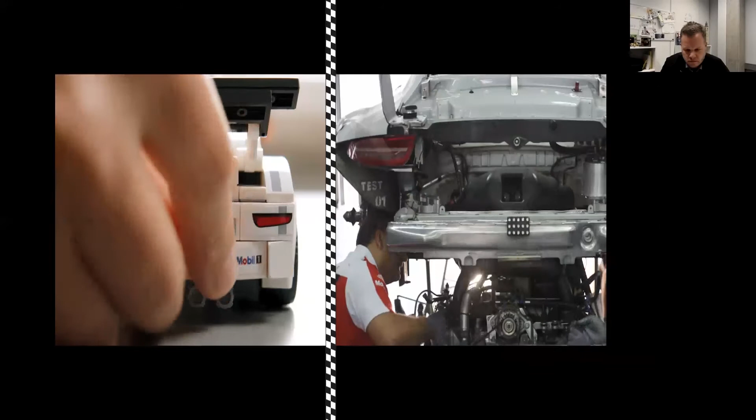Race cars, a boy's dream, a man's reality. Building the perfect race car is an art. It takes skill, dedication, patience, and passion. It's the kind of passion that turns men into boys, and boys into men. Lego, Porsche, we build race cars.

I hope that left a small smile, because this is actually very much what it's about for us. We are, as you know, a humble and proud producer of something most important in many of our lives, and that is our kids. That's what we've been doing for 80 years of history.

A little bit more about the Lego Group, just some factual things. I know you don't look for large company presentations, so I won't do that, but there are some things that have a logic to why I actually work on digitalization, and that's why I thought it would be good to show you.

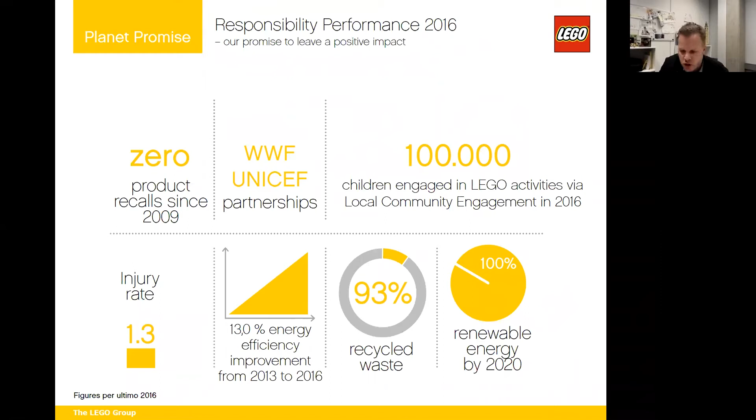Then our recycling and waste, that's also very important for us, so we can work on not giving anything back to the planet that we do not really wish for. And then we also work very much with renewable energy, and very much also with our owners investing in wind turbines, so you can actually see that on the next slide. I'm not spending so much time on this, but that's a positive impact.

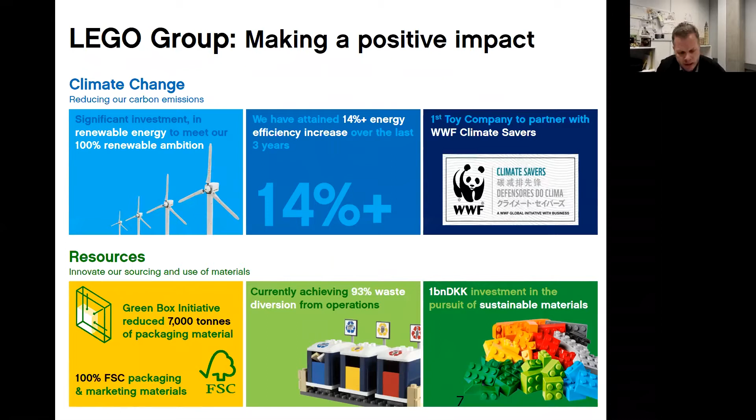Lego wants to explain a little bit the same thing here. One of the things not mentioned is also what we call the Green Box initiative, where we actually went one packaging size down, you could say, from all our packaging - the Lego box you buy. We made all our different sets in a smaller box, so not making it bigger, and then of course we're 100% FSC certified.

If you know anything of this presentation, you should really remember I've listed some fun facts here. Four of them: if you look at every person in the world, each person will own around 102 Lego bricks. Over the years, we have produced more than 760 billion Lego elements, and in 2014 we produced 60 billion bricks, which is 1,900 bricks each second.

Our famous minifigure is not really shown here by the kid - that's a classical 2x4 brick - but the minifigure that many kids see as an avatar for their play is the biggest population around the world if you count that. So we make a lot of minifigures, that's just our core thing. I'm sure you know many of them and hopefully have been playing with them as well.

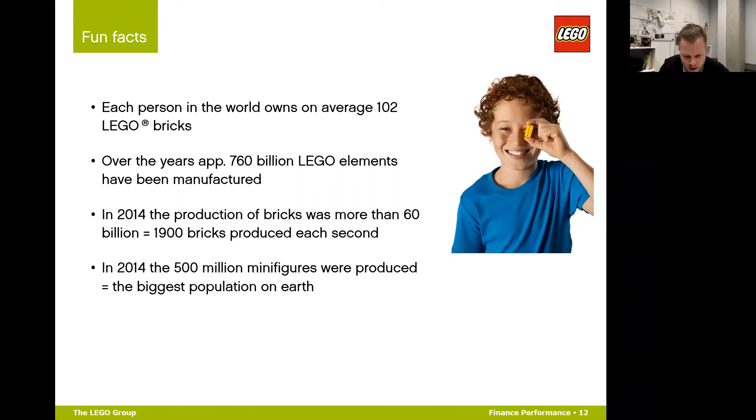And that's where I am in the organization. I'm part of an organization unit called Elements and Molds, and it's pretty simple - that's actually what I do. All the technical specifications of a Lego brick, we call them elements internally in Lego, and that's what I do. Everything on the plastic, my plastic engineers design and specify, so we know exactly that the element gets the quality for our building system as we want.

And then I also have the pleasure to make all the molds, the injection molds that we use. We are heavily an injection molding company. And then we also run in the molds - that's a big part of our business, to make sure we know how the molds should run in production, and actually also ramp up the molds in what we do. So that's a big part of my organization here.

It's also explained a little bit here - maturing design and specification of the element, finding out the quality, doing a lot of measuring, you can see there's a small picture of a Zeiss machine, and we produce - you see in the right corner - the injection molds of steel. A lot of new technology is developed in my area too, because if you think of the variety of Lego bricks in both size and material types, it actually requires constant development to be able to make the new Lego bricks we develop every year.

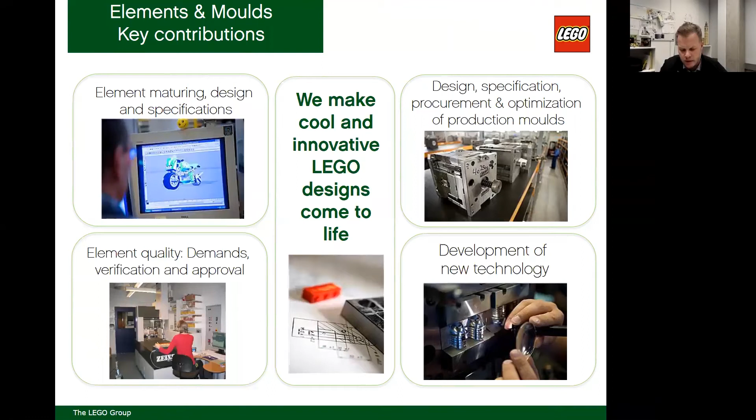Jumping into what I want to discuss with you today, share today - some of the manufacturing digitalization we have done around making molds and elements. I'm going to show you a little bit in the beginning broadly, and then also more concretely some examples of how we have brought this to the level we are at today, and are still working on.

When we started all this, we actually started, I think like many other companies, just to navigate in an ever-growing information level around Industry 4.0 and digitalization. What we started to do is actually to see what manufacturing trends are there, what could that do to enable our future manufacturing competitiveness. And that's - we looked, as you can see on the right, we stole the pictures from here, or copied with pride from Wikipedia.

What is the fourth industrial revolution actually doing? Connecting all your production equipment and all the process of the product you make, so you really know much more of what you're doing. I love this. You can already probably sense that I'm talking to big data, and that will be one of the really key things for where I am and what I work with.

We also know that it was exponential development, so what we knew 3 months ago is probably not really outdated, but at least a knowledge we need to constantly stay ahead on, because it's one of the most fast-growing exponential technologies.

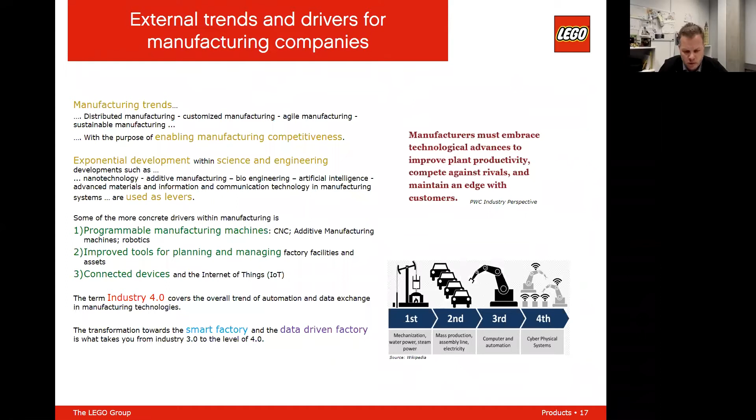So it's probably also clear what it is not, out of this definition for us. We translate that into some external trends and drivers that could become our opportunities, and we basically group that in two things: Industry 4.0 into digitalization in production, and 3D printing into additive manufacturing.

Then we did a lot of additive manufacturing - one thing for product. Is there an opportunity to do Lego bricks that we currently cannot do in injection molding? It's also an opportunity for additive manufacturing, also called SLS, to be applied in our production - simply using metal parts to 3D print things, where injection molding is very much about cooling and getting the right cooling channels. So sometimes, actually a lot of times, you cannot really drill what you want in your CNC machine.

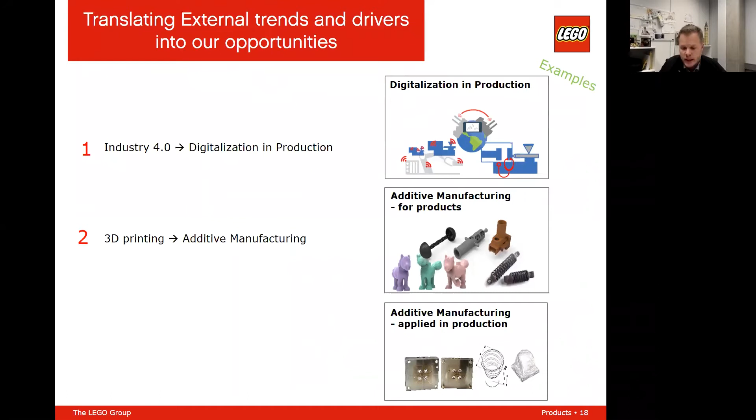And that's where it gives an opportunity to use 3D printing to really get the shapes you want. Digging into more digitalization in production, we actually tried to map what that will mean for us. You can see on the left side the same Industry 4.0 definition, and then you can see what we have defined we want to work with.

Just to read it for you: we looked at additive manufacturing, augmented reality, big data analysis, autonomous robots, simulation, and also connecting things in the Industrial Internet of Things.

So that meant that on the right side, that is the 5 things we chose to work with. There was a lot about user simplicity, so letting our operators have much more easy access to the menus on the machines. The big data analysis I already talked about, so really starting to collect data in our process to optimize the process. The smart factory - we discussed a lot and also tested things on.

And then very, very important, what I'll talk about more today, is actually the sensors, because that's some of the things we see in the process we work with - sensor technology being something we could apply more and more to learn about our process, but also really to optimize when we actually produce our Lego bricks.

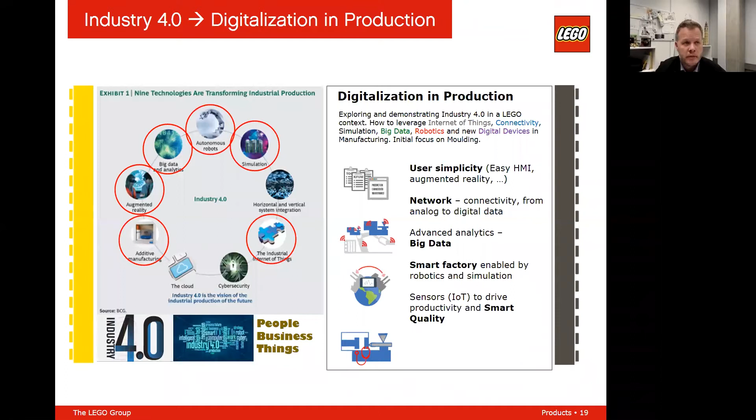We have worked with this in the production. There's a lot of outcomes, and that's why I'm doing it shortly now here, because I will go much more into the area that I've been working on.

You can see here in the pictures, there's been a lot of testing various things, and we have done it in a way where we've done small prototypes. We call them demonstrators, so we could actually show our different stakeholders and top management what this could be used for, instead of doing big 3-year projects. As an example, we've done stuff that is pretty fast, 6 weeks, so we get maybe an 80% solution and then show it really in a Lego context what the value will be of what we are doing.

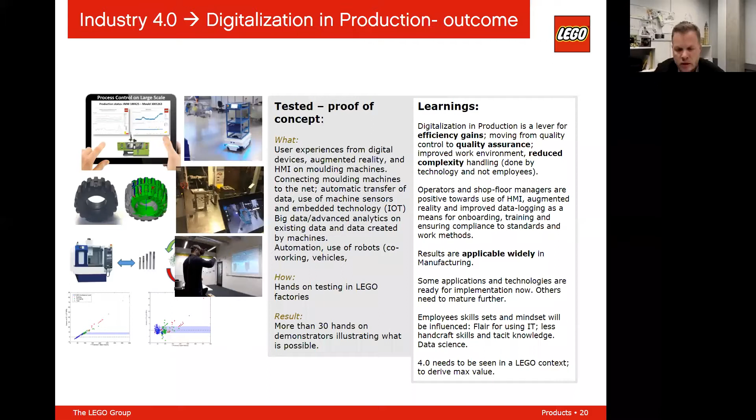So that was a lot about the process, and then we have looked into the printing done on plastic printing, doing various parts on how this will look like for us. So is there an opportunity to simply do totally new products using 3D printing? We have tested a lot on that.

Also did this in some of our brand stores. Lego has our own brand stores - at least I know there's one in London on Leicester Square, where we did various examples of customization of Lego bricks. You can see this example here on the picture, where we also tested this out in our New York store, on the Flatiron, one of the two New York stores we have.

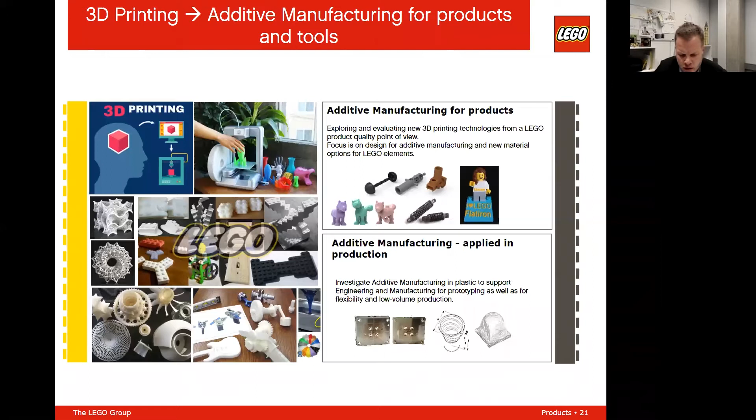And then what I know much more about is actually the additive manufacturing in production, where we have done much more on doing parts for metal that you can use for both low volume production, but also increased flexibility and responsiveness on parts, and then the whole capabilities of these metal parts that can do much more.

It actually comes more on this one. You can see examples of things we have done - both in our processing, but definitely also in our metal parts. So there's examples here of where we do different designs.

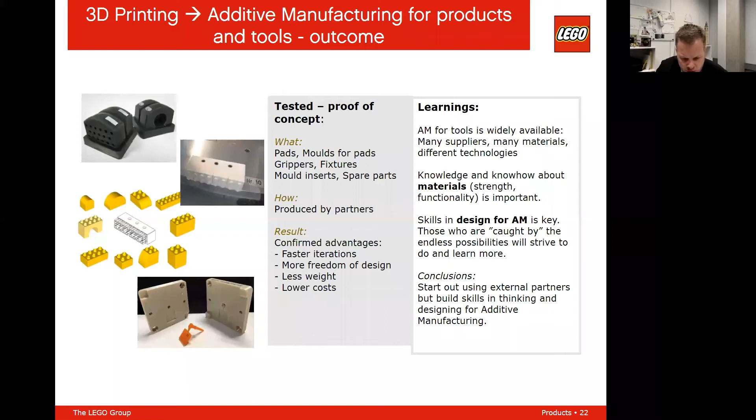One more slide here on a lot of learnings of how we have done it with our engineering teams. So there's an opportunity to do a lot of small scale production, as an add-on to our mass production, because there's no doubt Lego is a mass production company. So is there an opportunity here to work much more closely with doing small scale.

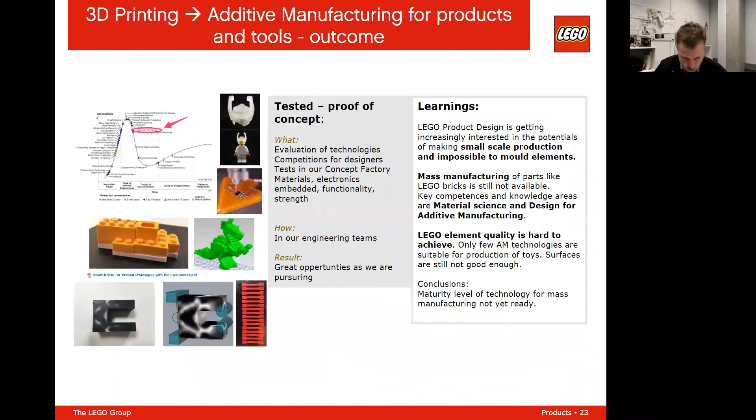Then, you know, this could be able to give us new competences and a competitive advantage. Here's some of the learnings we have shown by our first part of it, digitalization of production. So could it be the next level of capability building, really to understand our core capability? How could that be increased and multiplied?

We also saw how a data-driven approach can give us much more insights to things that we did not have insights to previously. With the onboarding we have gone through, opening new production sites globally, this is a massive load on the organization when we do that - could we do much easier training? Could we manage the complexity in our production much more with machines and not people?

That's also something we have looked into. And then, you know, higher quality output, and we'll reduce the resources that go into what we produce - so using less waste, for example. And then something that's becoming more and more important for us is also having traceability and reliability in our product. It's kind of always been there, but it's also increased what we could do.

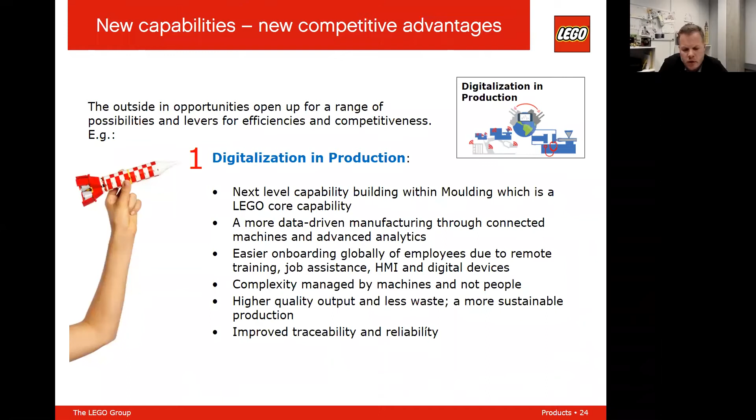In the additive manufacturing for our products, I've already spoken a little bit to that - could that add on innovation, a new product newness, things that we have never seen before? Could it reduce our lead time as well, bringing our elements faster to the market?

I've already talked about the small scale, high quality manufacturing. Could that complement our injection molding capability? And also, we need to have an understanding of design for additive manufacturing, because that's a completely new way of thinking for us as well.

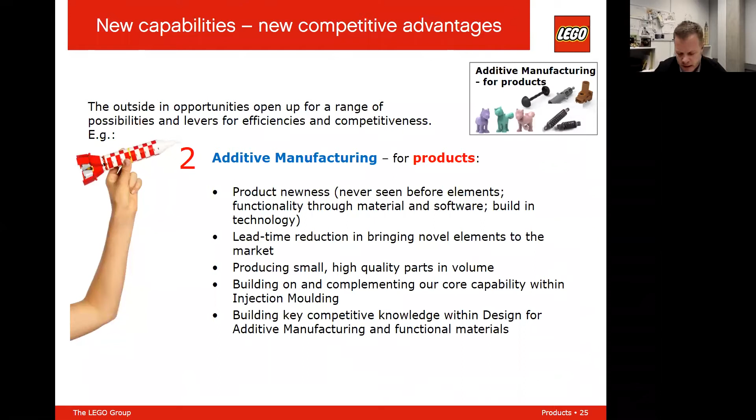And also, the functional materials - because many of our plastic elements today have both a design, but they also have a function, as we call it, because they need to be built together into a building system. So it's not only making something very, very cool that can stand alone, it has to fit into a building system in the many ways a kid and a designer can use the bricks. So that's also a thing where I think we are pretty advanced in connecting plastic in the way we do the whole system, and that's putting a lot of technical requirements on the materials.

On additive manufacturing, both plastic parts and metal parts, that's a lot about agility and flexibility. Reducing our lead time and our costs. It could also empower our employees to solve problems much more locally, so you don't need central teams to do it. And when we work with our IP partners, we could do much more fast prototyping and small volume tests. So that's one of the thoughts we've had.

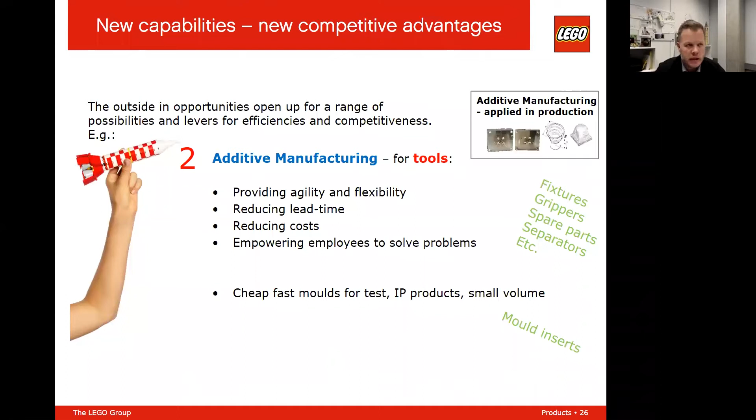That was the very broad introduction to where we in our operations part have been working with digitalization and IoT. So now I'll dig much more into my own area, where we've taken an approach to see how we can make mold making much more digitalized.

The example I'll give you here investigates the prospects of real-time adjustment of the production process to really minimize production downtime and material waste. That's lean thinking in the way we optimize the production of molds.

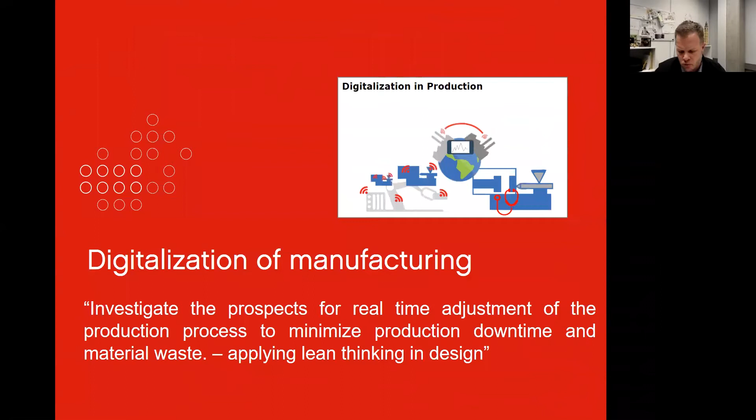As I showed you in the beginning, this is a very simple drawing of a molding machine. You can see the screw, the horizontal part that looks like a hammer, or maybe more like a pencil, if you don't know much about it. That's below the triangle where you add the material, and then you have the mold, symbolized by the black square, where you can see the hammer inside.

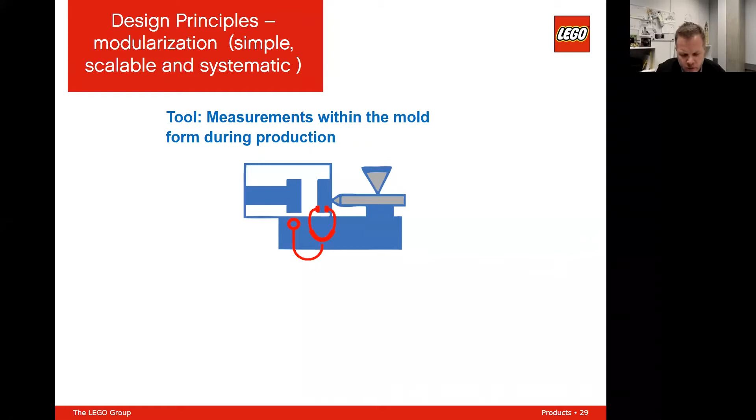We put this together like a doctor's way of thinking, because we actually want to know what happens inside the molding process. We also had an idea about being able to measure the bricks, because there's an increased wish for traceability and understanding the quality.

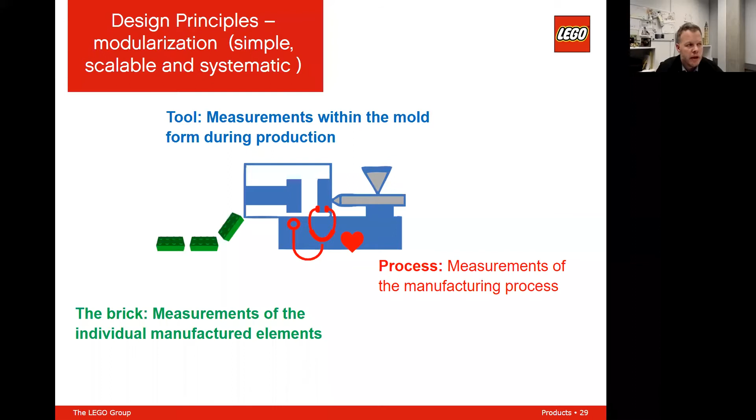Could we build a system where you could know everything about every brick we produce, and also really measure the manufacturing process - the heartbeat of the process? So we know that when we put up a mold in a molding machine, it's actually running according to our specification, and we don't need to touch it. We don't want our operators to measure what we produce and then adjust - we simply want the machine to be self-adjustable. That's what I'm going to talk about right now.

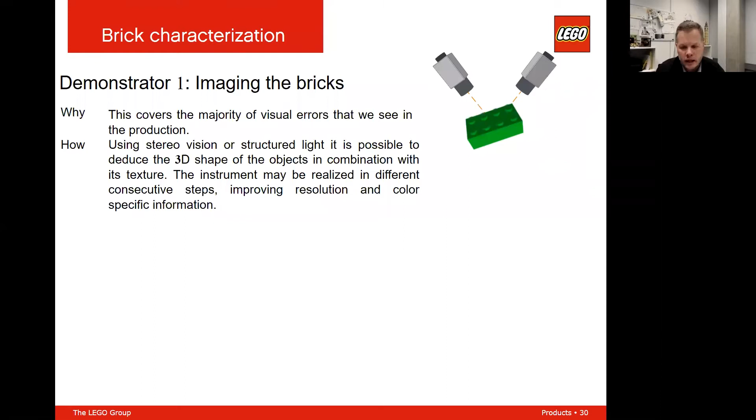We did different demonstrators here. As I mentioned, we had what we call demonstrators - things we wanted to try. One of our first ideas was, could we use the steep rise in new technology, like modern cameras and 3D vision of shapes, to make an image of the bricks? Instead of traditional measuring, could we 3D scan all our bricks and know whether they're in the perfect shape? That's one of the ideas we had.

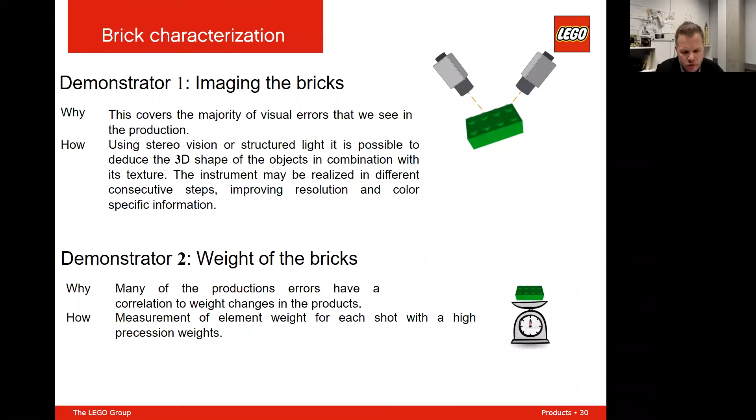We also wanted to still weigh the bricks - put a weight on them - but instead of the traditional way of running them on a conveyor and then weighing them, are there other ways of doing that much more smartly with digitalization?

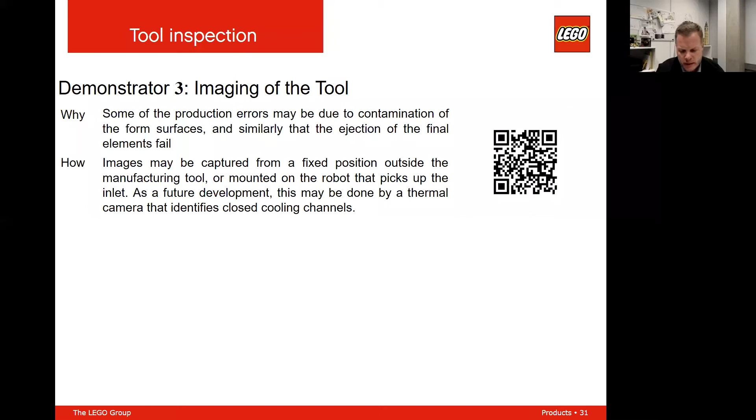One thing that maybe sounds pretty simple to many of you: are we fully in control of the molds? We have many molds at Lego, so are we fully in control of the condition of the molds, so we get the best product? Of course, we'd like to do that much more smartly using smart codes. It probably sounds a little simple, but it was actually a big thing for us regarding tool inspection.

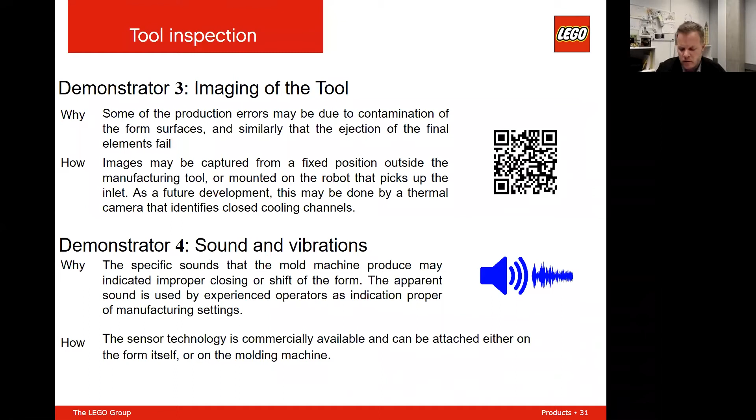One of my favorites: if you go into production, you can often ask a very senior operator how things are running, and they'll just listen, almost feeling the vibration of the machine, touching it with their hand to know if it's okay. Could we build that kind of experience into sensors, so we could get proactive if the machine starts not producing the right way, and react before machine breakdown - a whole different type of maintenance on the machine? So putting much more intelligence into that, and then a lot into material properties.

So, is there a lot to moisture when you do injection molding? There's different materials that react to moisture - I know some of you on the call know everything around that. There could be density and also viscosity changes in the material, and we need to adjust accordingly.

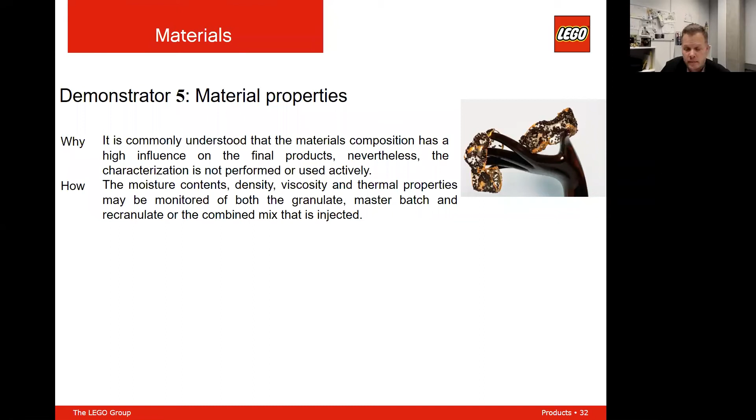That's something we really should run, so we do not generate material waste and actually miss a production order. And last but not least, it's not only the molding process, but also the mold should be calibrated to the environment it's in.

We produce in many different parts of the world, and we use the same material. So having the machine and environment adjust to the process or to the region we're in.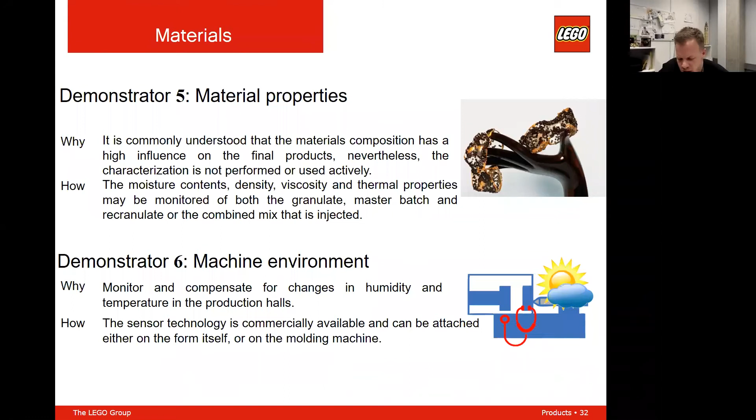So, is it a region with high humidity, very hot temperatures, compared to where I'm from, where it's normally very cold, or not very cold, but colder than, for example, Mexico? Could that also be a fantastic thing to work on?

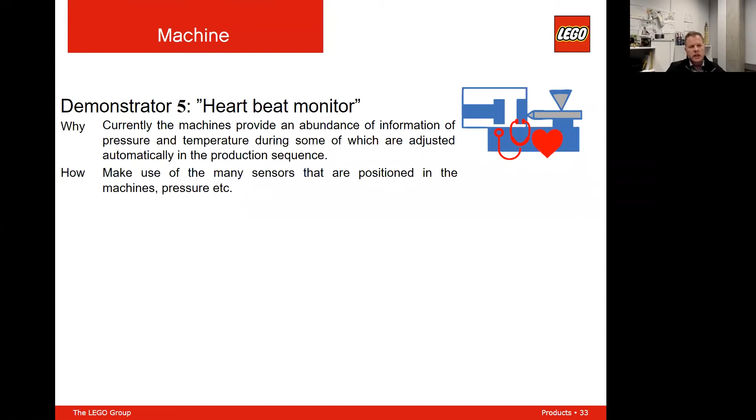Yes, and then we would also like this heartbeat monitor to measure the process, so we get constant tracking. When we mold, could we know exactly what condition every production batch ran under, so we are in control of our product and generate all this data?

And also, when we introduce a new mold to the manufacturing, could we automatically calibrate the mold - what we call the mold card - so how to run the mold? That could also be interesting, along with a lot of external equipment around the mold.

I'll become a little bit more technical, but regrinding of our inlets, the drying of our materials and stuff like that - could that be done so we connect all the different parts? So that's been the thinking from the beginning.

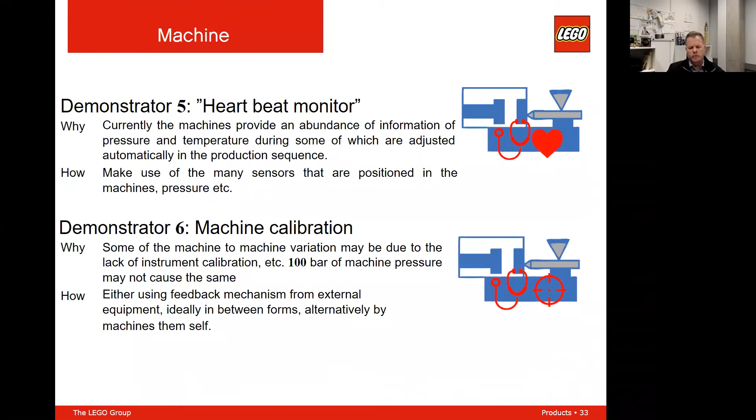Then I'm deep diving on one specifically, and that's something we call independent process control. So could we let the machine, if there is a variance from one batch to another, calibrate based on the baseline there is in the machine?

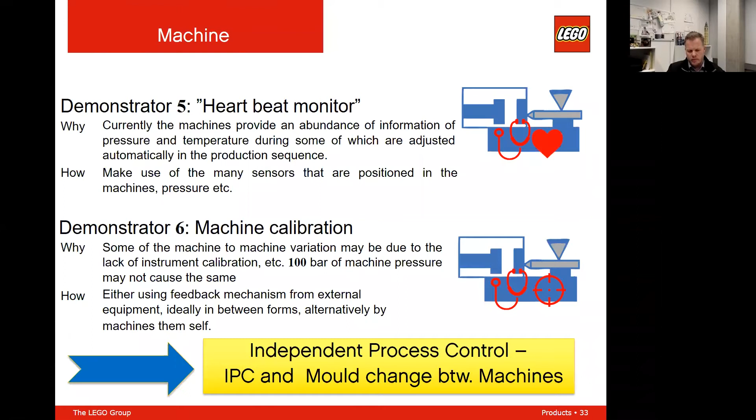Now it becomes a little bit more molding nerdy, but I hope you can follow me on this topic. We call that independent process control, and that was really to make the machine and the process independent of materials, machines, and production site.

So we would like to measure directly where the element is produced - that's called the cavity in the mold. And then we need a sensor to really measure, is this the right condition we are producing under, measuring both pressure and temperature. So the machine could do a closed loop control to self-adjust and bring things back to the baseline - we have defined the optimal line of production.

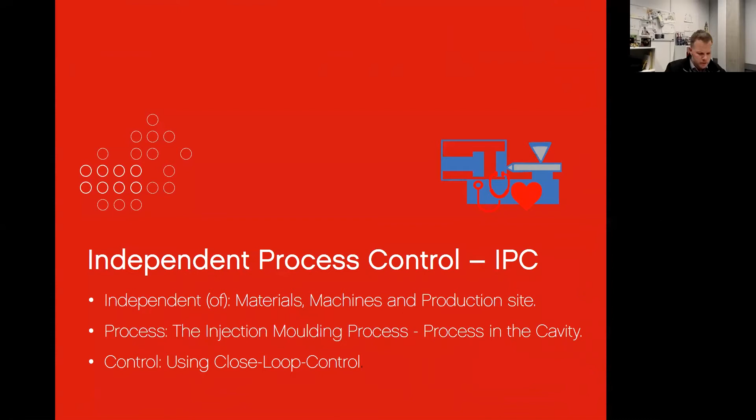So it's very, very simple here. I'm showing going from a constant process on the molding machine to a much more constant process in the cavity, so we know exactly what happens in the moment our product, our Lego brick, is made in the mold.

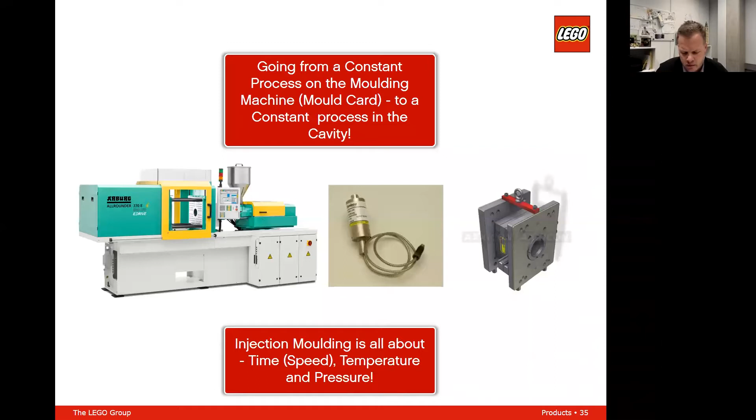Very simply, injection molding is all about time - the speed you press the material into the mold - and also of course the temperature. So we have the right melt temperature of our material, and of course the pressure you press in with, because that's where things can really adjust and work according to our specifications.

I'll go through this very fast, but I want to show the method we run on when we do injection molding - there's a phase where we inject the material into the mold, and then there's where we keep the pressure, so we make sure every material gets to every part of the mold, and then we cool down the material.

So we get the element we want. And if you know anything about injection molding, the cycle time is a super important cost driver, and also important for how efficient you can run your production.

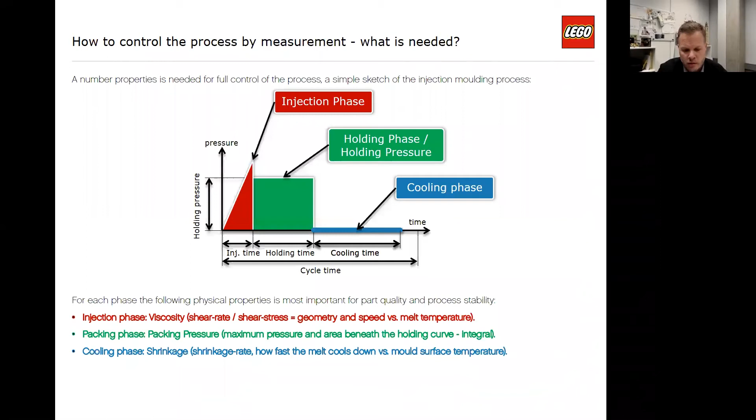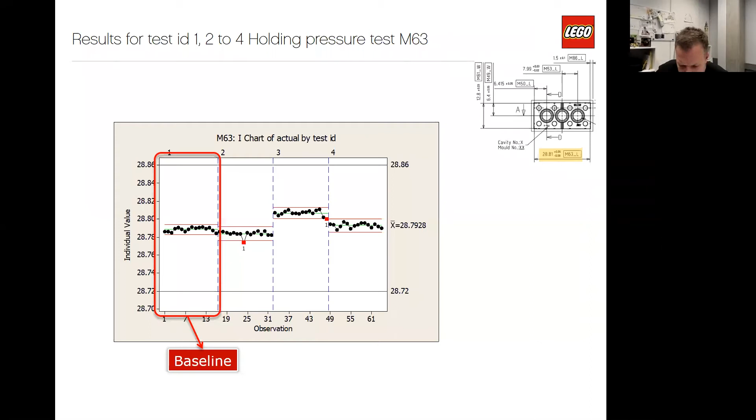And then we actually changed the batch of the material and did some really crazy stuff, where you can see some of the dots got outside our baseline, so they're simply outside the norm, both lower outside the norm and actually also above the baseline.

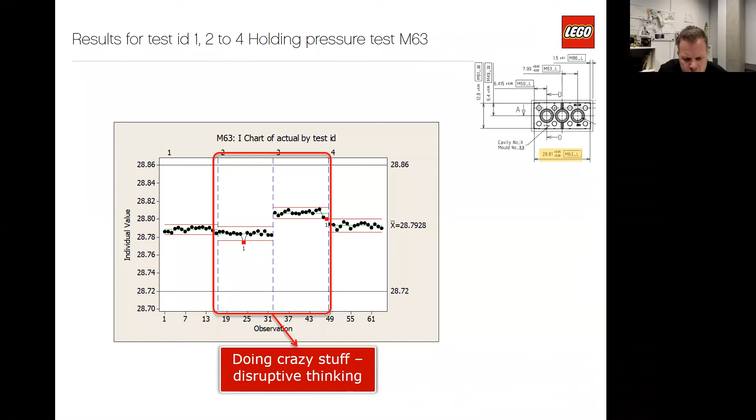And then we let the machine do self-adjusting, so only by sensors, adjusting the pressure and the temperature, and then the machine actually self-calibrated, just by knowing, not by measuring on the product after molding, but reacting in the process to what happened with the sensors in the mold, and it self-adjusted.

And that was kind of a big eye-opener for us, that you can actually use standard products and then make the machines close-loop if something happens. That's a fantastic thing for us when we develop and test new things in our molds.

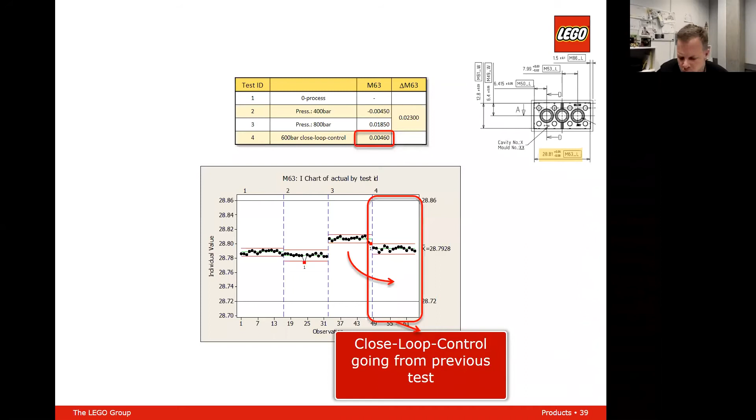We have not yet introduced this to production, and we don't know yet if we want to do that, but it's definitely a huge part of when we develop a mold and run in the molds, to understand if they deliver the product we want.

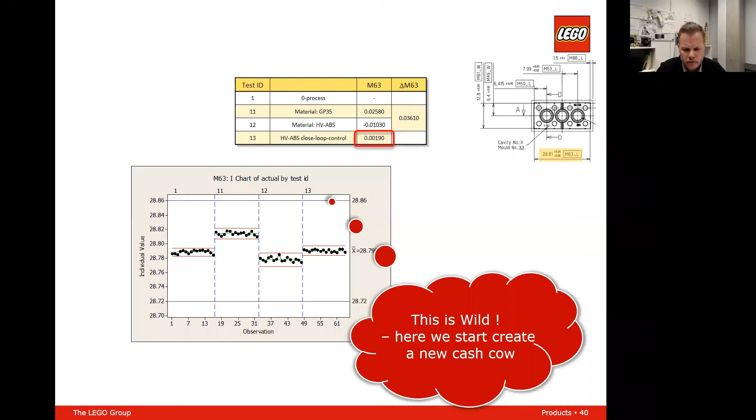And that's why we call this the new cash cow, because could we start exploiting and taking test time out of our molds and running in the molds in a whole new way? So we reduce our lead time and also our investment in the molds.

I think that was kind of where I wanted to go, and I really hope I did not speak too fast towards the end of the day here. I can see we've just used 35 minutes.